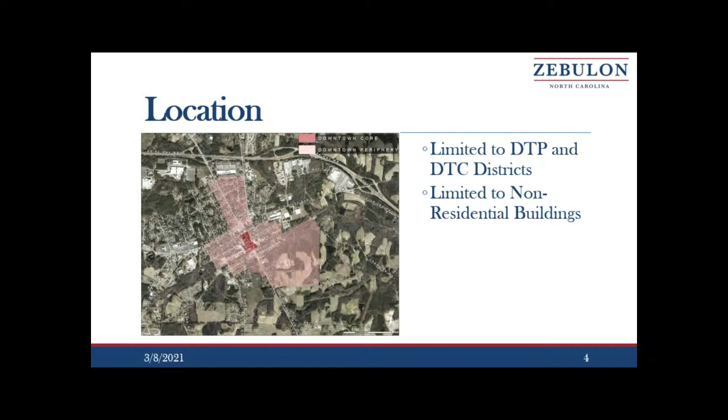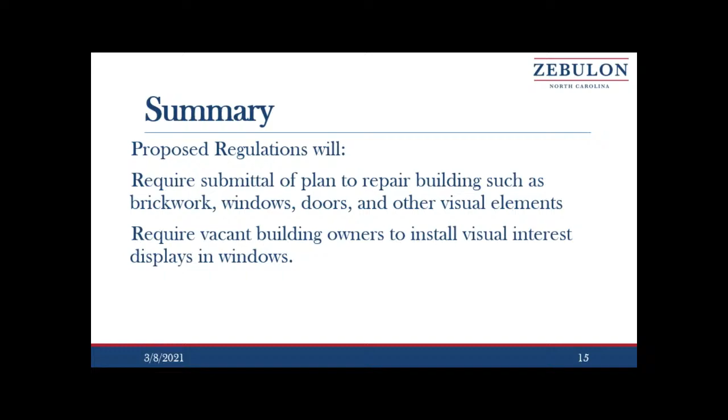We realize this is not going to be an overnight fix, but by communicating with these building owners, laying out the processes and steps, and possibly even the funding — whether they utilize the facade improvement grant or other opportunities available to renovate the exteriors of these buildings — same thing with the visual element, we want to make sure we work with them.

As I noted, it can be very ornate, where it's a display-type gallery in the front windows, or it can be something as simple as working with Preservation Zebulon for historic photos, or working with local schools to put up art that kids have made in the district. As a parent, I'd be thrilled if my first grader had a piece of art in a display window, even if it's in a vacant building, but at least it's on display. It's a great opportunity to partner with local organizations.

One thing I want to get across is this isn't just about code enforcement, it's also about economic development. In 2002, Southern Business and Development magazine said when site-searching the South, inspect the community's downtown first, because that is the heart and soul of every community. That is where the vibrancy starts. If a community is invested in its downtown, it's probably going to be invested in other places.

Yes, the interior corridors with entryway and gateway signage, 97, 96, 39, Old 264, all those gateways coming in, that's significant. But making sure you have the downtown well-established is probably one of the biggest key economic benefits a town like ours will have. Think about other communities with this vibrancy, Wake Forest, Apex, it's because they have a vital downtown that's constantly growing and improving.

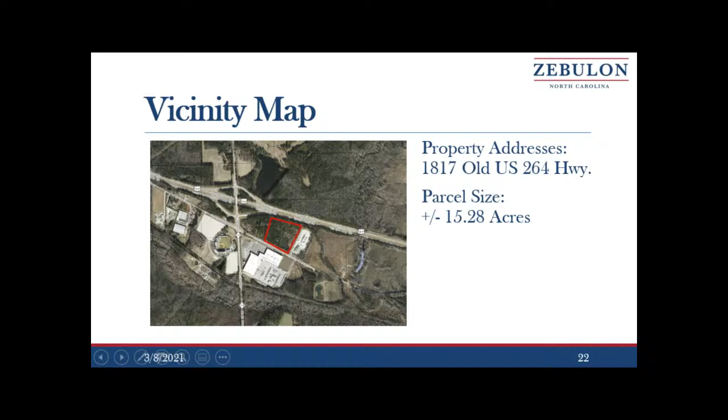This is a vicinity map. As you can see, the parcel in this aerial photo is wooded. The Duke Energy site is adjacent to the east. Across Old US 264 Highway is the US Foods Warehouse. And to the adjacent west is a vacant parcel.

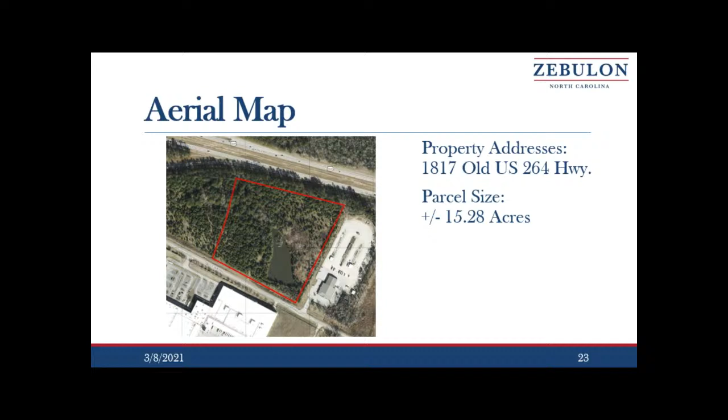As you can see here, the aerial shot shows the site's wooded, and then the Duke Energy site to the adjacent east. If you look closely, you can see that the Duke Energy site has asphalt and pavement along the public areas of the operation, and towards the rear, where the storage and company vehicles would be, the site is using gravel.

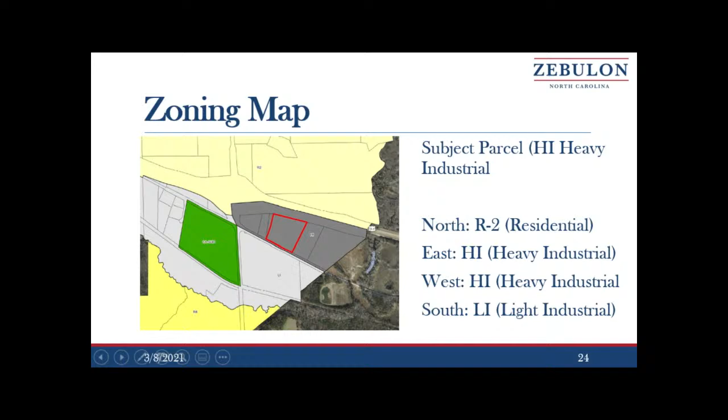The applicant did submit conditions. There are 8 conditions. The first condition is a maximum of 80% site coverage with washed stone surfacing and grass parking areas. The second condition is that the entrance apron will be approximately 250 feet of the access road.

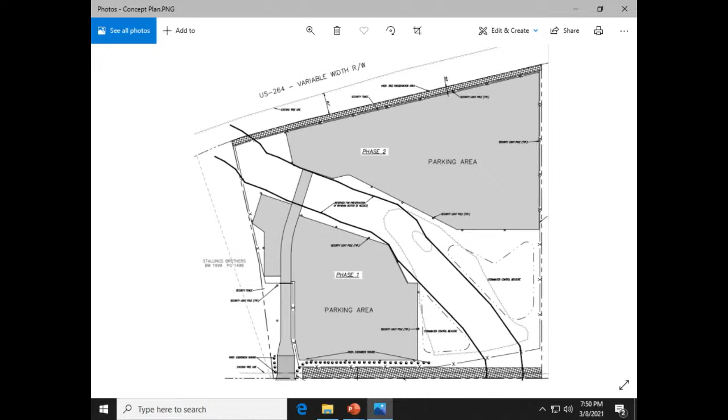The third condition is that there will be additional landscaping along the paved access road between the pavement and the security fence, for additional screening of the parking areas within the fence.

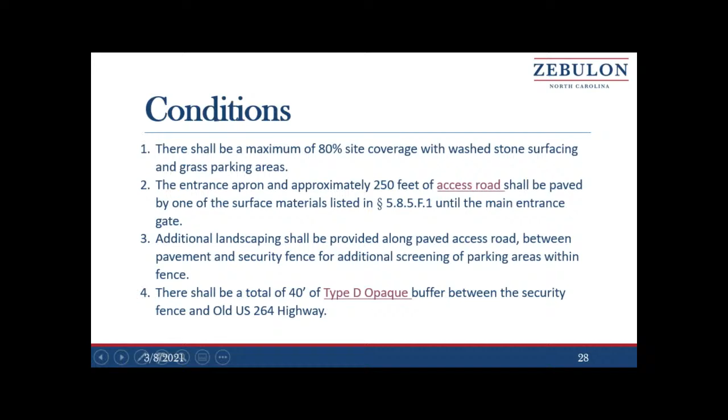The fourth condition: there shall be a total of 40 feet of type D opaque buffer between the security fence and Old US 264 Highway. The standards of this type D opaque buffer are, every 100 linear feet, you'll have 4 canopy trees, 8 understory trees, and 35 shrubs planted 3 feet on center.

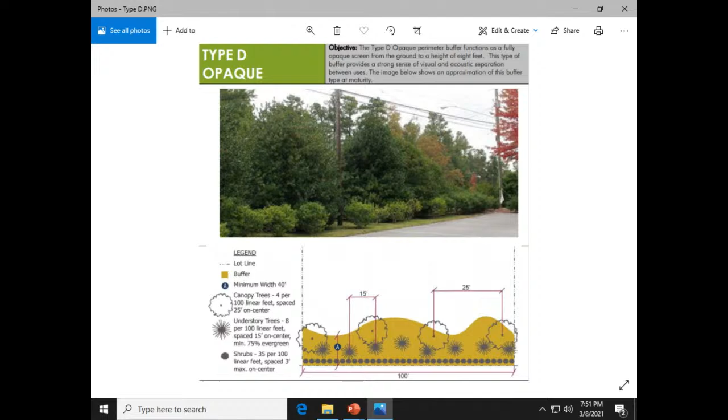To give you an idea of what this type C semi-opaque buffer is: every 100 linear feet, you'll have 3 canopy trees, 6 understory trees, and 25 shrubs planted 3 feet on center.

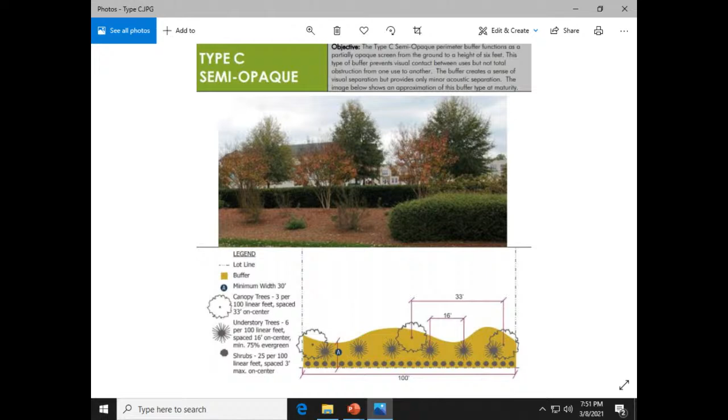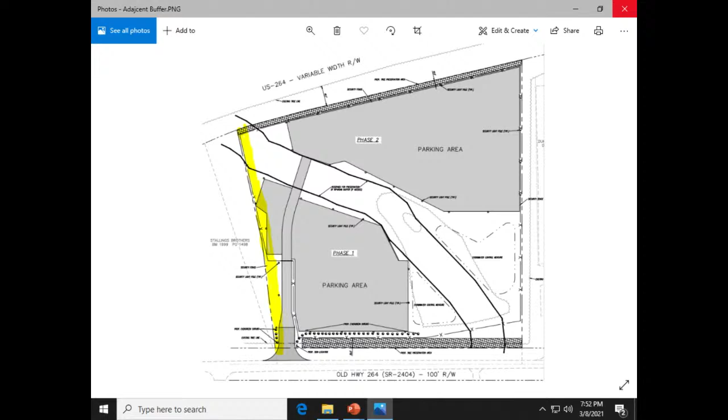And then along the western boundary, identified as Wake County, pin 2715737661, there'll be a 20-foot semi-opaque buffer. To show you where this buffer would be located, this area is highlighted. As I stated previously, that's a vacant parcel to the adjacent west.

Condition number 7: there shall be approximately 400 feet of 6-foot wide concrete sidewalk adjacent to old US 264 highway, approximately 1 foot inside the existing right-of-way. Just to give you an idea, the linear frontage of the parcel is 700 feet, so this would almost be half of what the town would require for a sidewalk along that street's frontage.

The 8th and final condition is the applicant will apply for annexation within 30 days. This is a concept plan submitted by the applicant. The main reason for this conditional rezoning request is they want to use the parking area and driveway access outside of that condition, and the condition of the internal drive. But any other drives, parking stalls, or vehicular service areas would be gravel.

Staff recommend that they go through the conditional zoning process because it is a deviation from code standard 5.8.5 F1, which requires materials be asphalt, concrete, or of sufficient thickness for any parking areas, driveways, or vehicular service areas on developed sites.

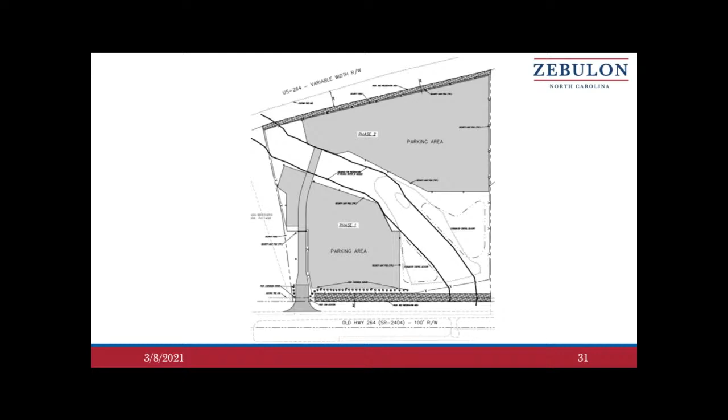We've been upfront with the applicant that we wouldn't support this being a 100% gravel operation. That's the reason for them to come forward with the conditions, to go through this legislative process. We talked about doing something similar to the Duke Energy site to the adjacent east, and we advised them on a rezoning case we had a few months ago back in 2020 on Green Pace Road, which we approved office buildings with gravel towards the rear, but all the public areas on that conditional zoning would be asphalt or concrete.

On that site, there's also additional screening with fencing and landscaping. But the main reason for staff recommending approval of the Green Pace Road zoning was the primary uses were office or warehouse uses.

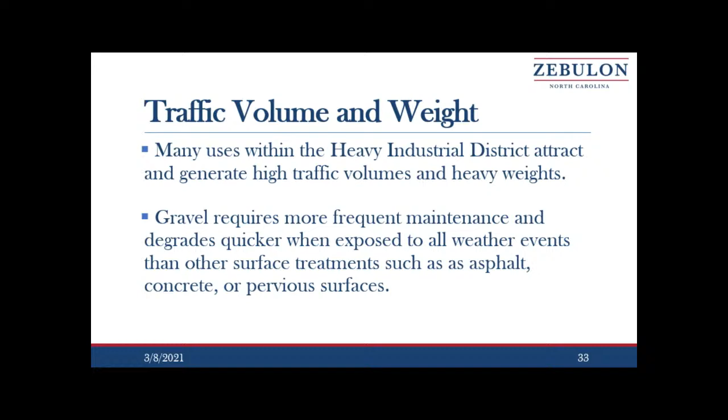Some of the concerns staff has with the proposed gravel lots are traffic volume and weight. Many uses within the heavy industrial district attract and generate high traffic volumes and heavy weights. Gravel requires more frequent maintenance and degrades quicker when exposed to all weather events than other surface treatments such as asphalt, concrete, or pervious surfaces.

The second concern staff has is public health and safety. The quicker degradation of gravel exposed to higher traffic volumes, heavier traffic loads, and all weather events produces unsound surfaces for parking, storing, walking, and ADA accessibility.

The third and final concern is code enforcement. Improperly maintained private lots are largely out of town control, and resolution of these issues requires an inordinate amount of staff time. The allowance of gravel in the heavy industrial district would magnify the frequency of these issues and pull resources away from addressing other code enforcement needs throughout the town.

Once again, these were the 5 standards. The first is whether the proposed conditional rezoning advances the public health, safety, or welfare. The second is whether the extent to which the proposed conditional rezoning is appropriate for its proposed location and consistent with the purposes, goals, objectives, and policies of the town's adopted policy guidance. The third standard is whether approval of the conditional rezoning is reasonable and in the public interest. The fourth is whether the extent to which the concept plan associated with the conditional rezoning is consistent with this ordinance. The final, 5th standard, is any other factors as the Board of Commissioners may determine to be relevant. That concludes my presentation.

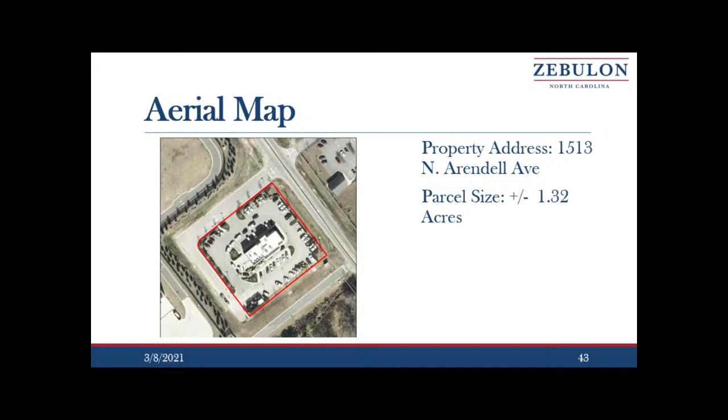It does contain a fast food drive-through restaurant, and as I noted, the parcel is currently zoned light industrial. All of the surrounding parcels, with the exception of the parcel just to the south, which we'll get to in a moment, are zoned heavy commercial. The parcel across the street is heavy commercial conditional zoning. That was the conditional zoning request that came before you late last year, one of Mr. Perry's properties, where they were requesting conditional rezoning to put in a drive-through restaurant.

This is the site looking south. This is from the curb looking at the building. And with that, I am available if you have any questions.

Okay, RZ 2020-03, 49 Green Pace Road. Okay, this is the next of the rezonings. The subject tract is a portion of 49 Green Pace Road. It is owned by BB&T, but it is the tract just south of the Bojangles. It is currently zoned light industrial, and we're proposing to rezone it to heavy commercial.

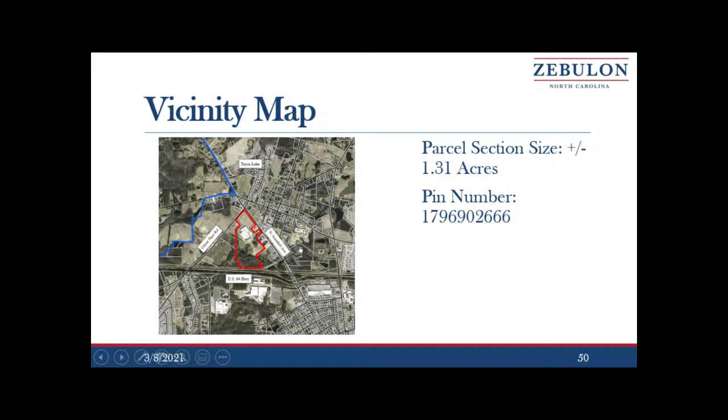As you can see here, 49 Green Pace Road does cover quite a bit of land. However, the portion that's being requested to be rezoned is just the small section where their entrance drive is, located just south of Bojangles. This is a little bit better view of it. And as you can see, the rest of the BB&T site is currently zoned heavy commercial, so this would bring that section consistent with the remainder of the parcel, as well as correct the previous Unified Development Ordinance regulation.

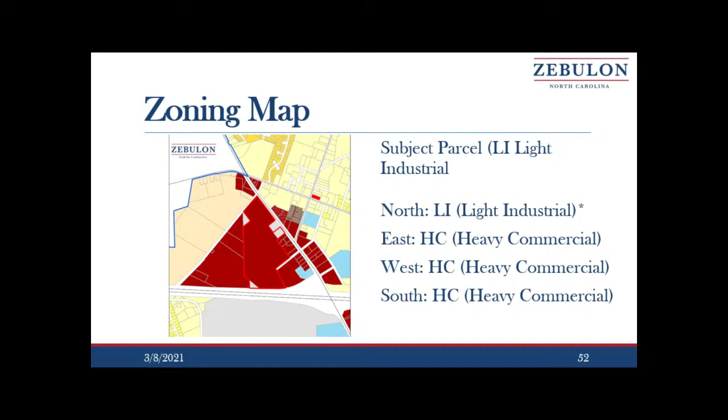Similar to the last one, with the exception of the adjacent parcel owned by Bojangles, everything else is zoned heavy commercial. Staff does recommend approval of this, and these are the site photos going onto the site. I'm available if you have any questions for this one.

So how was this just a portion of the property? Were these separate properties at some point in time, and they've been combined? Yes. Because I just don't understand how a portion of a tract of property gets zoned incorrectly. BB&T, up until last year, owned several different tracts, and they did what's called a recombination plat, where they come in and request that all of their different parcels become one parcel. However, that only changes the property lines. It does not change the zoning classification.

Okay. Anyone wishing to speak? Hearing none, we'll close the public hearing and refer the matter to the planning board. I'll call RZ 2020-04, 213 Moss Road into session.

Okay, this is the final of the three corrections. This is 2013 Moss Road. It is owned by Wilbur and Teresa Pulley. It is currently zoned R2. However, in the previous zoning code, it was zoned heavy business, and that was the zoning classification the applicant requested some years ago for an operation on the site. Staff is proposing to restore the commercial zoning classification to heavy commercial, which is most consistent with the uses compared to the previous zoning code.

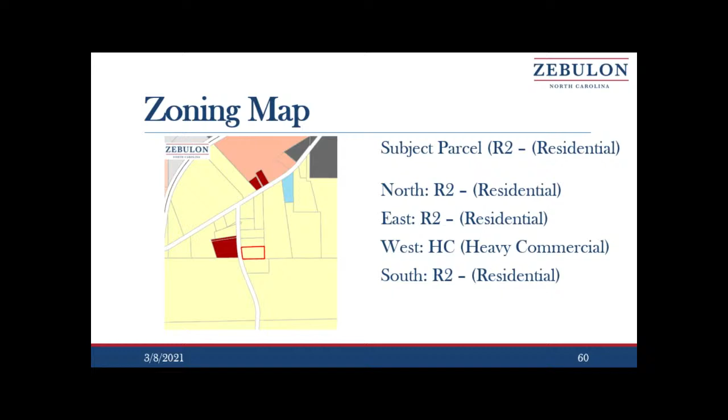It is located on Moss Road. This is zoomed in. There is an auto repair facility type garage located at the front of the parcel. I do not know if it's in operation. I've gone out there a couple times and not seen any vehicles parked there. But as you know, the parcels right across the street are zoned heavy commercial, whereas the rest of the surrounding parcels are zoned R2. Staff is recommending approval of the proposed request, and this is a photo of the sign as well as the auto repair garage facility on the site. And this is facing south, I believe. I'm available if you have any questions for this one.

I have one question, kind of a procedural question. When the property across from Bojangles was misclassified, didn't that property owner pay a fee and incur expenses to get it corrected, when it looks like we're doing all of these free of charge? For the property across the street, if they came in with just a traditional rezoning, we would have waived the fee to correct the error of the Unified Development Ordinance. However, they requested a conditional rezoning, which does take additional time and puts additional conditions and factors onto the parcel that would not be pertinent to any of these other ones. Okay, so it was above and beyond just correcting how it was zoned. That is correct. Okay, I just wanted to clarify that. Thank you. Other questions?

Did we have written communication on this one? I did not. Okay, anyone wishing to speak on this matter? Hearing none, we'll close the public hearing and refer the matter to the planning board.